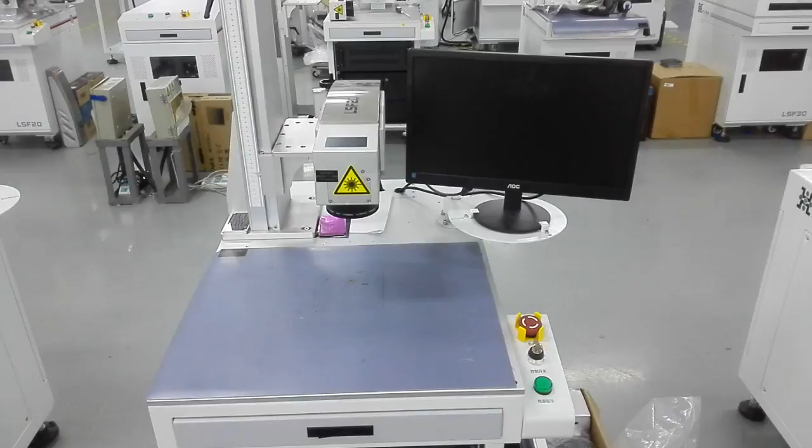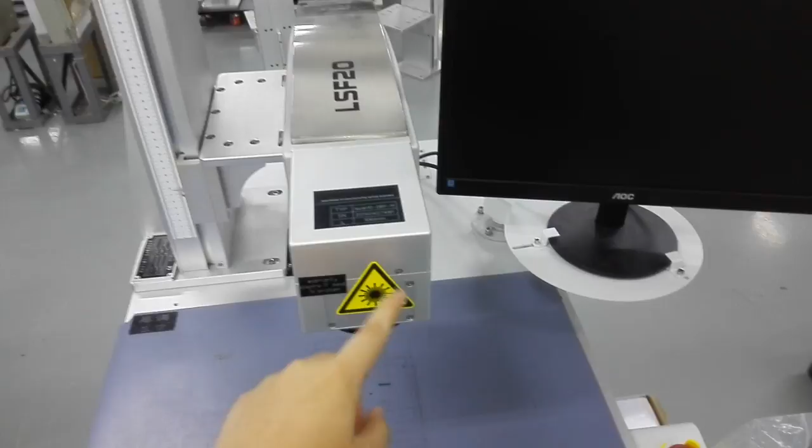HGLaser LSF Laser Marking System Operation Guidance. Our system is a 20-watt fiber laser system. It is air cooled. Here is the galvo head. The laser will come out from here and do the marking at this area.

The software interface will be shown on this screen. Here is the power off and power on switch, and also the emergency button.

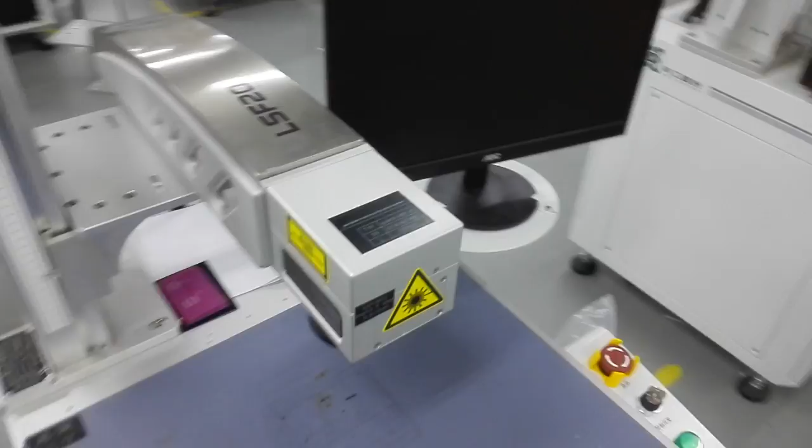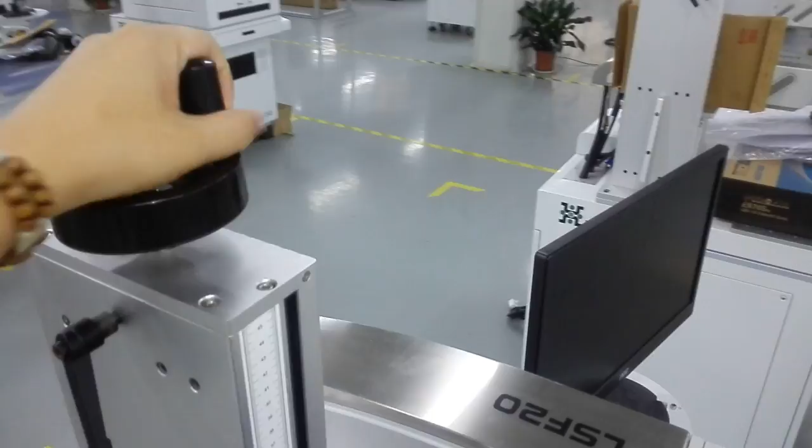With the laser marking system, you should always do the marking in the focus area. So here, you should adjust the height. The adjustment method is to use this to unlock it, and the height can be adjusted by this wheel manually.

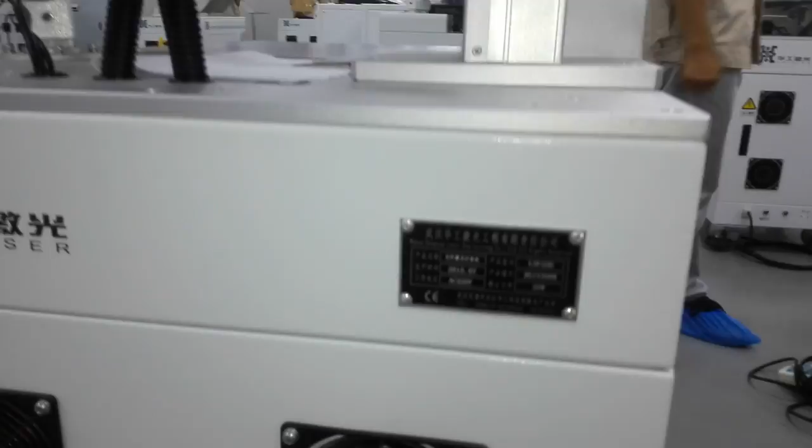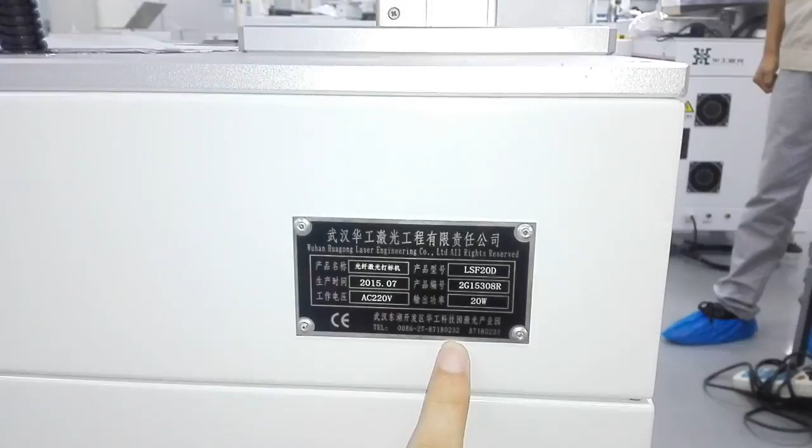If there is any service issue, please contact our local agent or us through our website. On all of our systems there is a nameplate. Just mention the serial number to us and call us or our local person. Now I will introduce how to use our system.

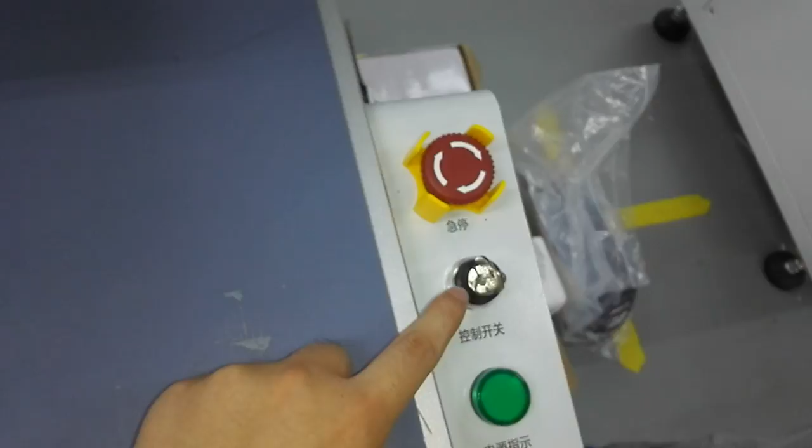When you want to turn on the system, ensure this emergency button is released. Otherwise, the system will be locked and you cannot turn it on. Here is the power switch. To turn on the system, first turn the main power switch on. Second, turn the key switch on, and the light will show green.

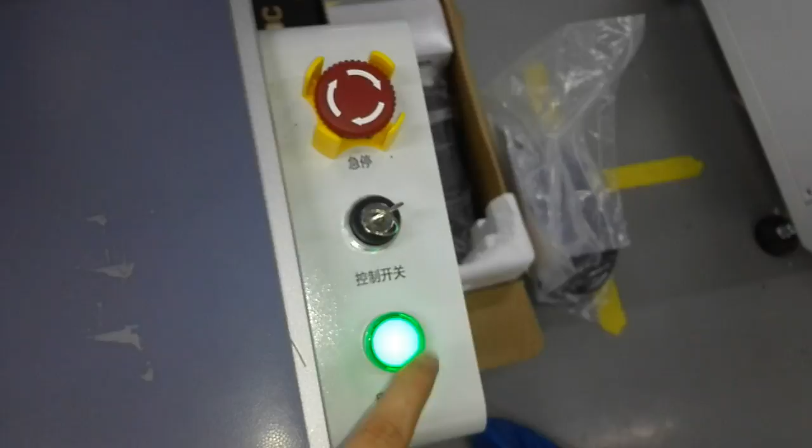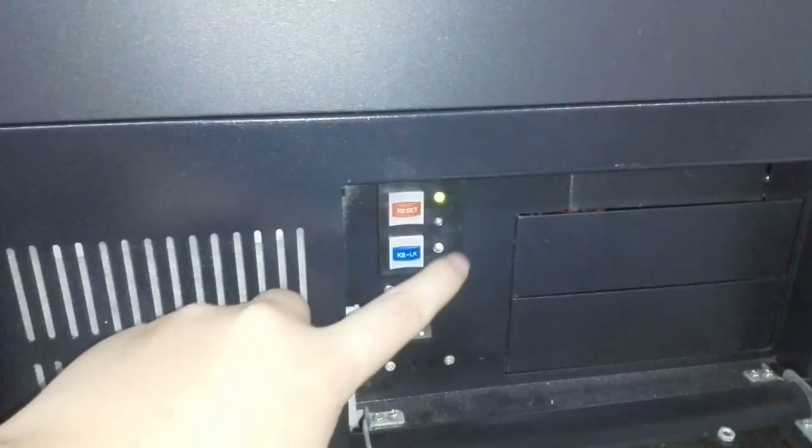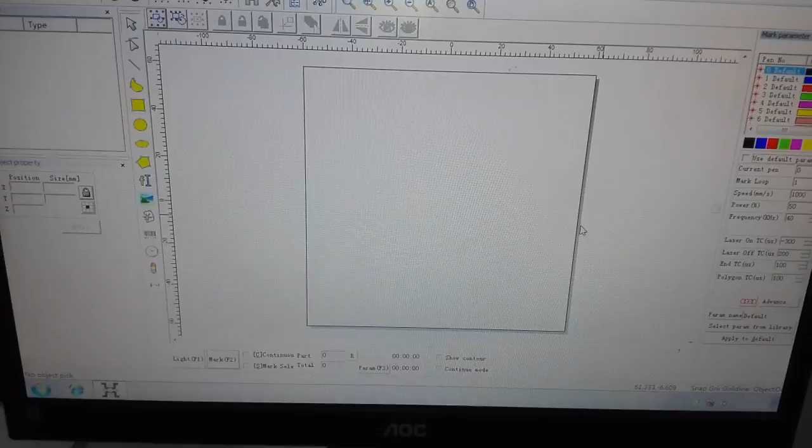Below the system is our control PC. Just turn on this button, and in normal working condition, this should show a green light. Once you turn on the PC, you can see on the PC screen our software interface. Then press enter. Once you enter the software, here is our software operation interface.

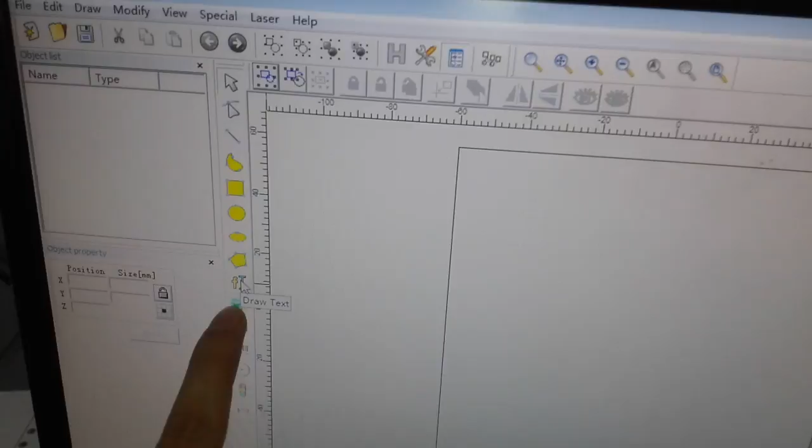You can draw simple graphics from here. If you want to mark a barcode, you should use this one. If you want to add text, you can use this one. On the right side, all the parameters are shown. Normally, we just use three parameters: speed, power, and frequency.

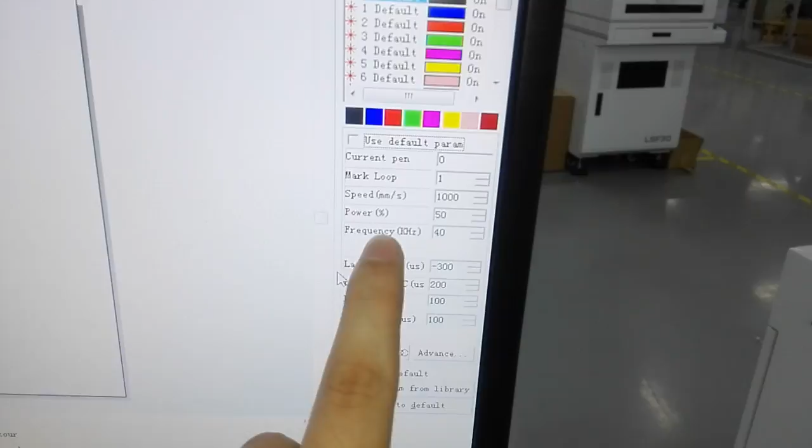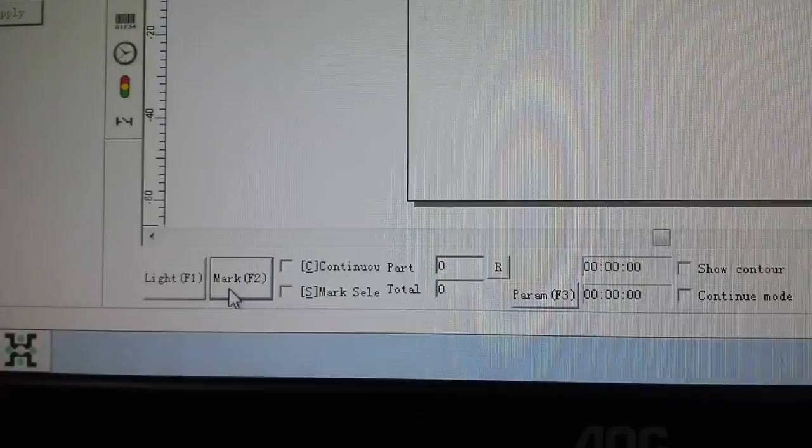At the bottom of the software, there are two buttons. One is the red indicator, which shows the scan area. The mark button turns on the laser beam to start the marking process. Now we will show you how to adjust the Z focus.

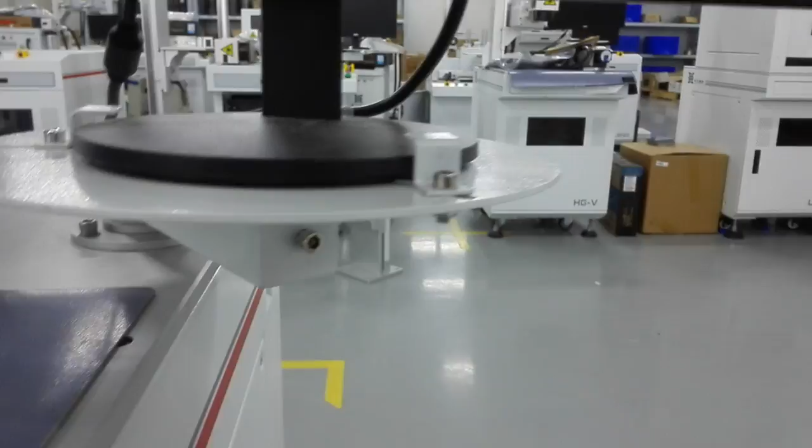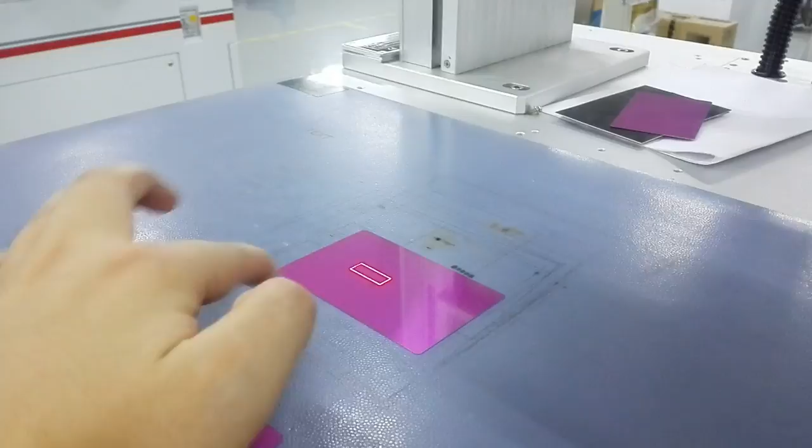First, drop one text on the interface. Then use the red indicator. You can get the exact area on the marking place. Then choose continuous to start the marking. You can see the marking is not clear.

Once you adjust the Z-axis, the marking will be different. Just find the most powerful area, like this one, then stop. At that position, we get the clearest marking. So this is the right position.

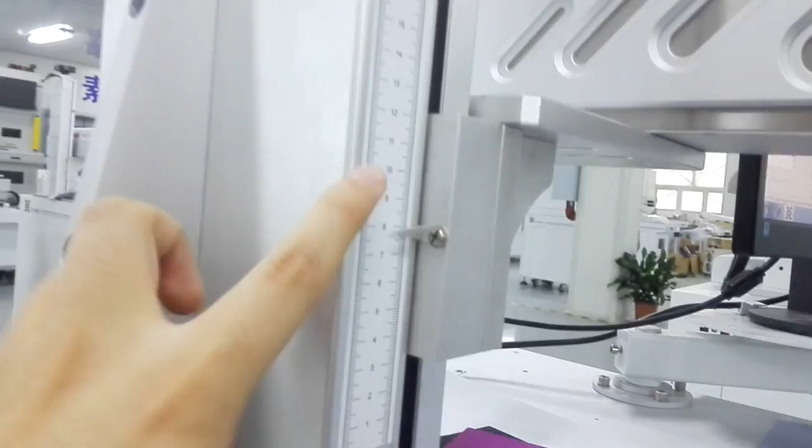Then you can record the Z-axis data in your notebook. So next time you mark this kind of item, you can use the same height. Different materials have different heights. So every time the height of the item is different, you should adjust the Z-axis manually and then take a record.

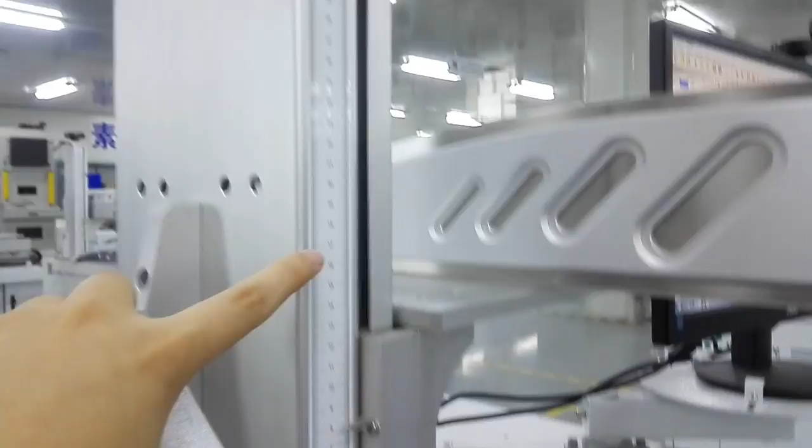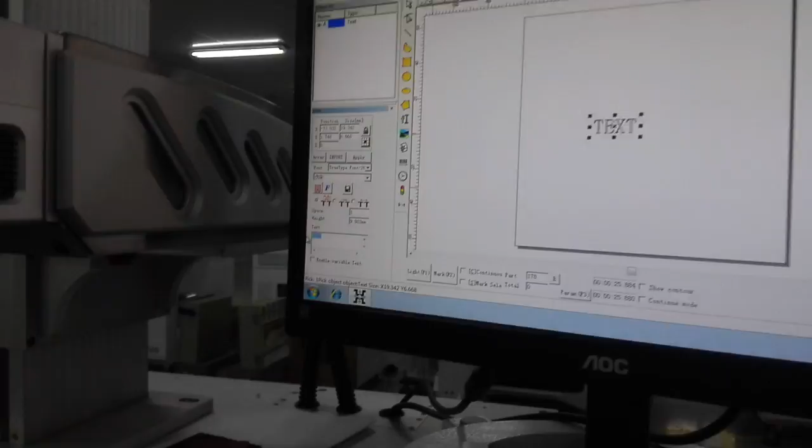Now we will tell you how to set the marking parameters. Now we will show you how to do a text marking. First, select the text and drop it in the area. The default text will be text one. Here is a text input interface. Just type what you want and click apply. Here it will change into the exact text.

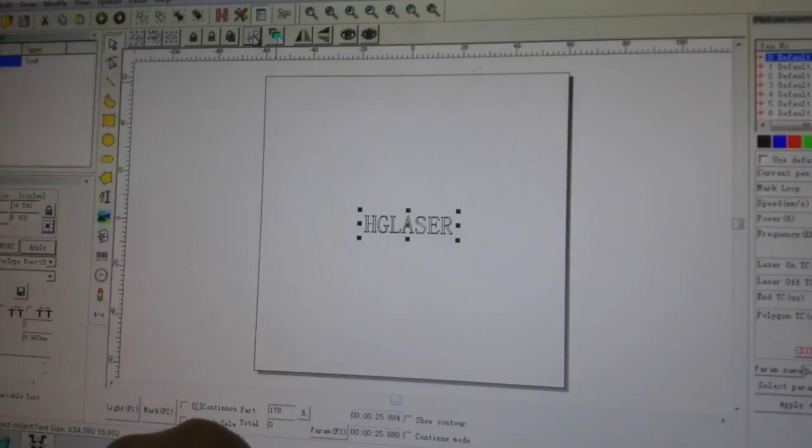If you want to fill in the text, you should use the fill method. In this interface, you can use different parameters to do different kinds of filling. Let's set the filling distance to 0.5.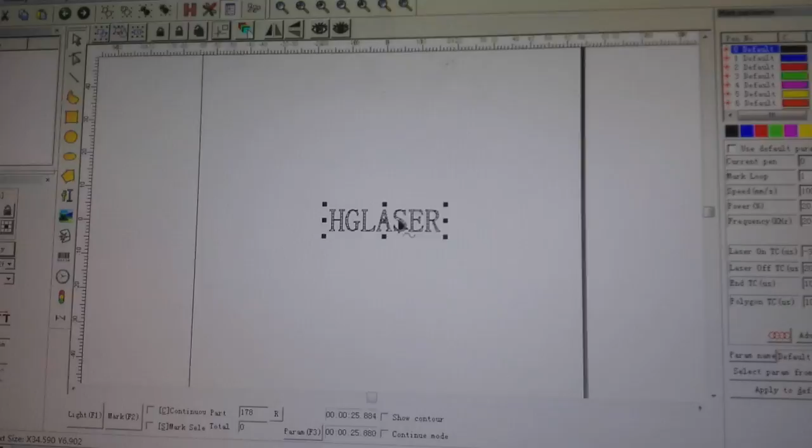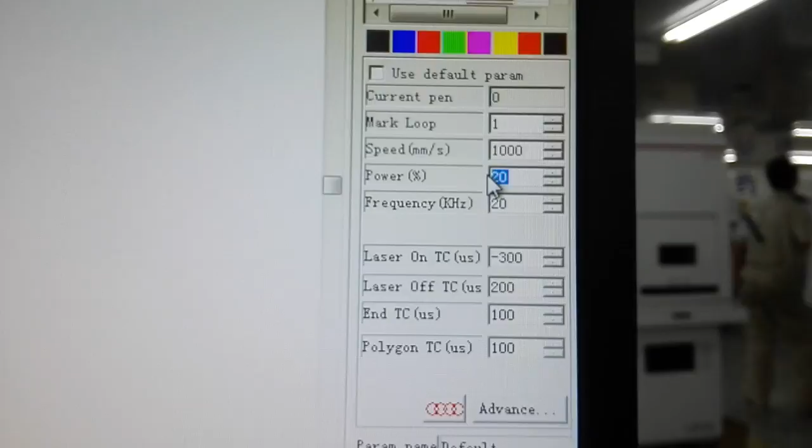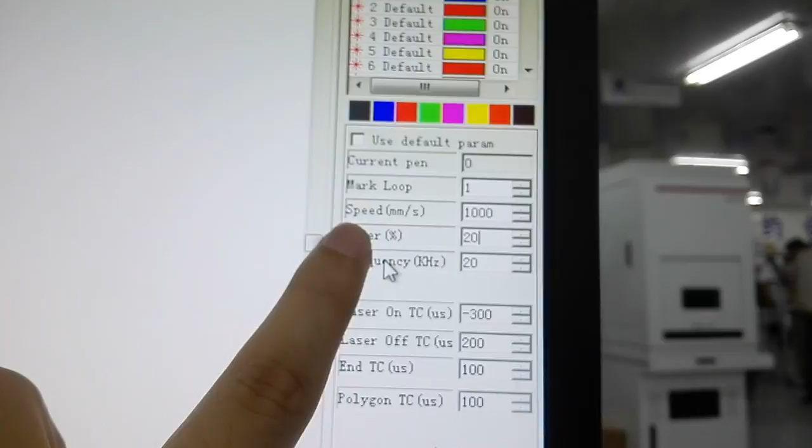And then you can see it's already filled. Now we will show you how different parameters produce different marking appearances. Normally, for marking, we use speed, power, and frequency. Right now, we keep the power and frequency the same and set different speeds. The marking speed is 1000 mm per second.

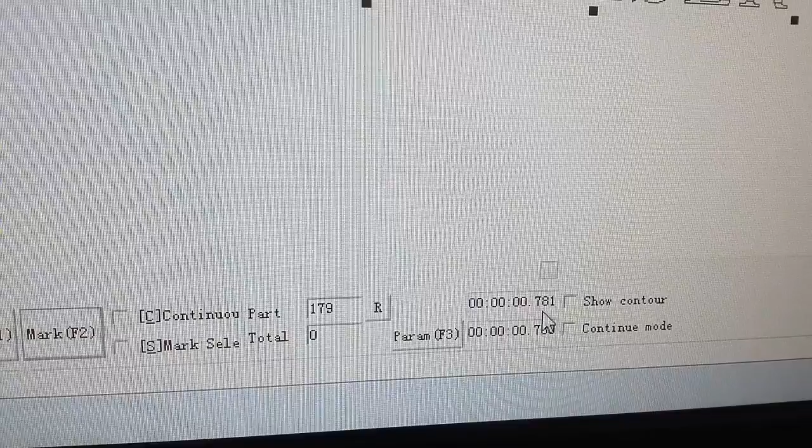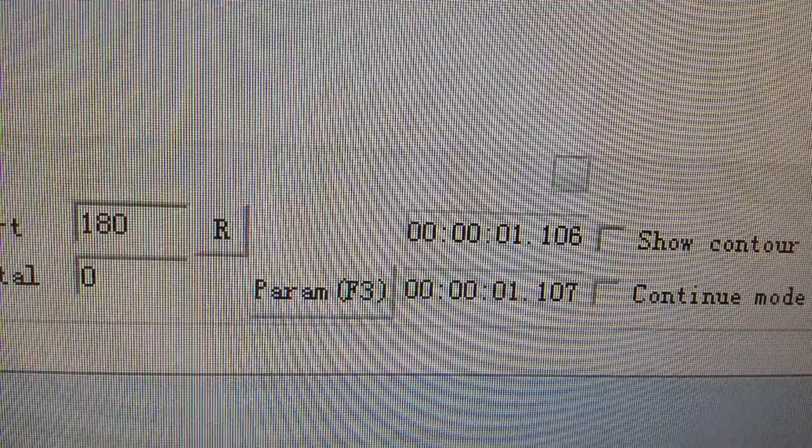You can see the different marking appearance. With less marking speed, the marking accuracy, resolution would be nicer. With small marking speed, you can get more clear marking.

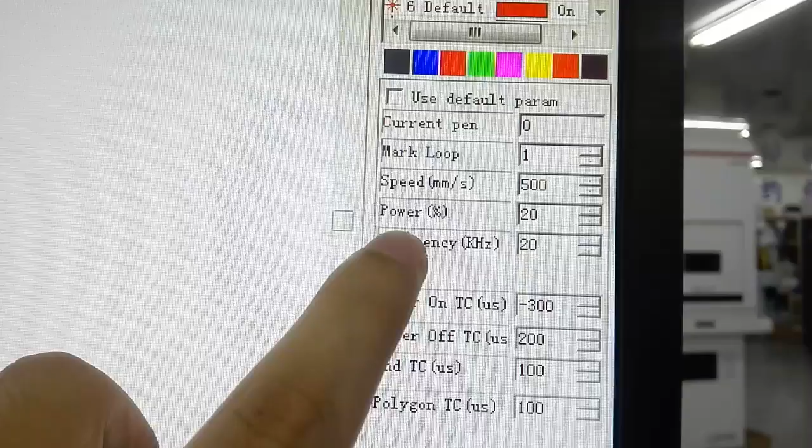Right now, we keep the speed the same, and we change the power. In this condition, the power is 20%. Let's see what we can get. The marking is in 20% laser output energy. It's clear, but seems a bit light.

Let's set the power to 90%. See, here we already changed the power output to 90%. Here we click Start Marking. You can see the 90% of the output power. It can get more clear marking than the 20%.

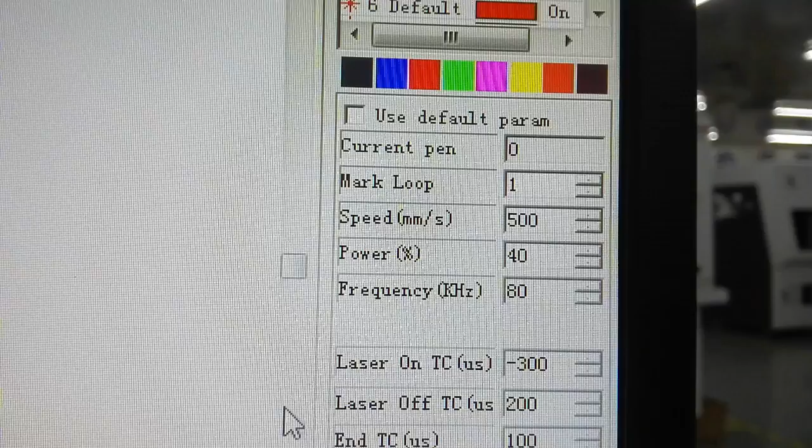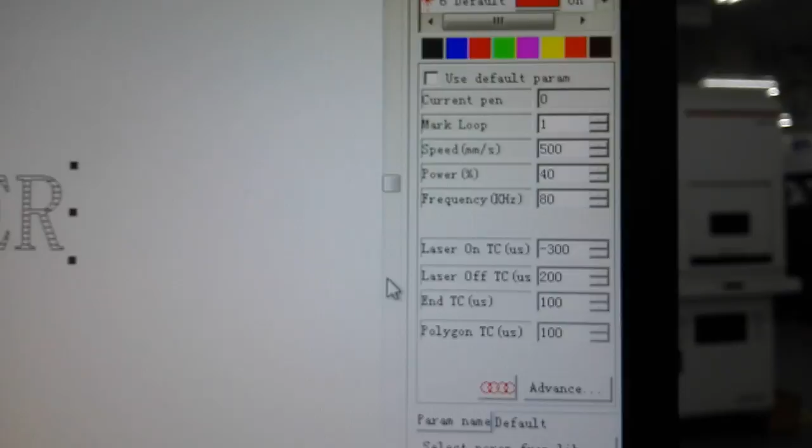Right now, we keep the speed and the power the same, but we change the frequency. Right now, we change the frequency, set it as 80 kHz. Let's see what will happen. Okay. You can see in 80 kHz, the marking is a bit light in color, but seems in good resolution.

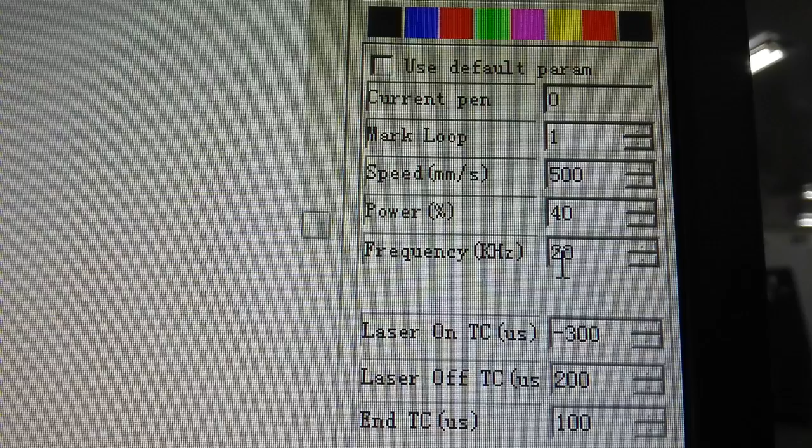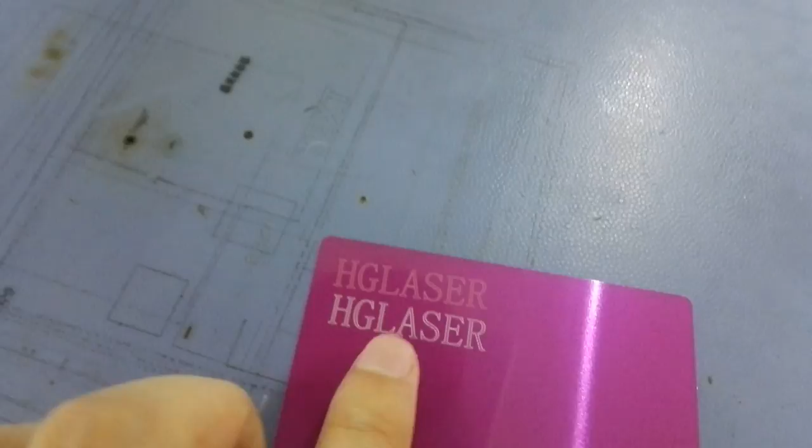The frequency into 20 kHz. And here we mark. You can see the color would be more, but the resolution would be worse than the high frequency one.

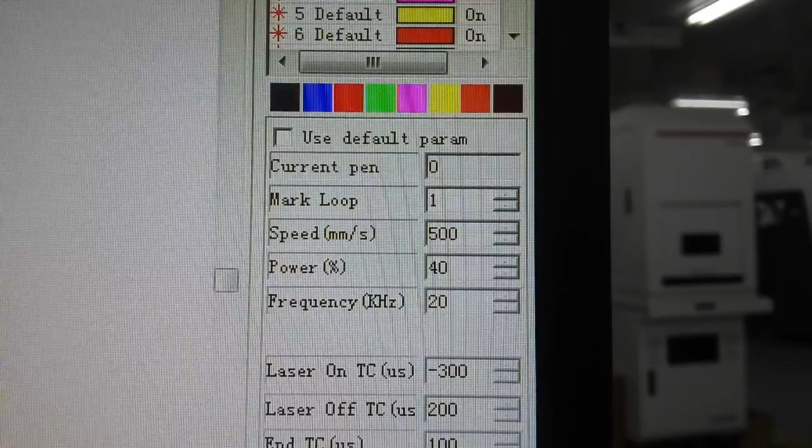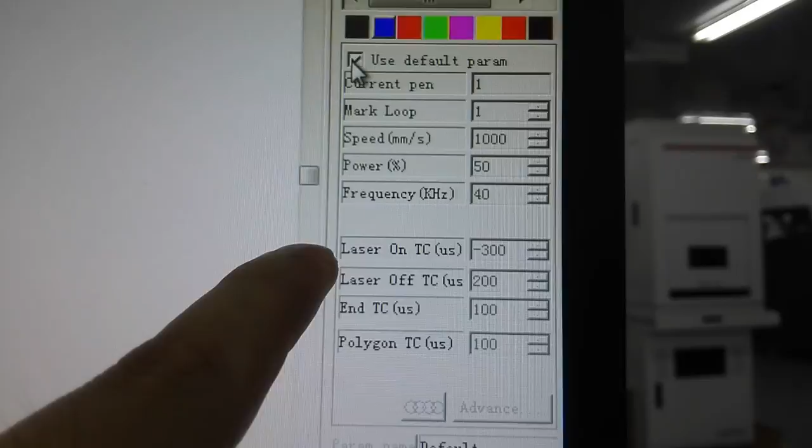So for different material marking, you should change to different speed, power, and frequency. You should test the material and then find the suitable one. But just notice the z-axis, you should find it in the right way.

Okay, there was one more question. Normally, sometimes we should mark different appearances by different parameters. How to achieve it? We can use these different layer colors. Different color means you can use a different layer. In each layer, you can lock different parameters.

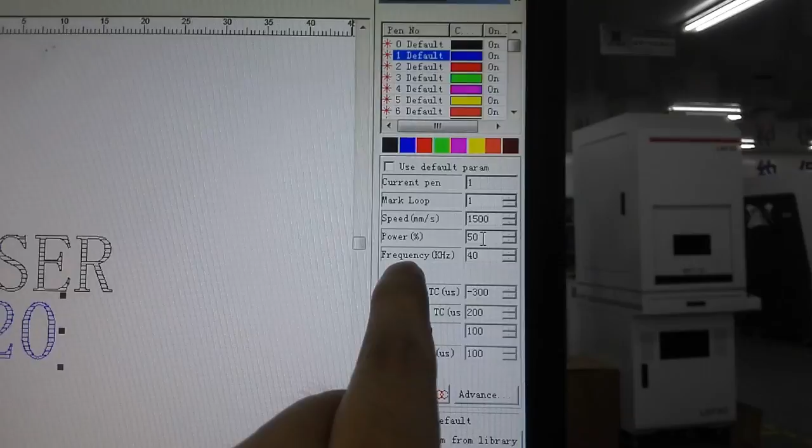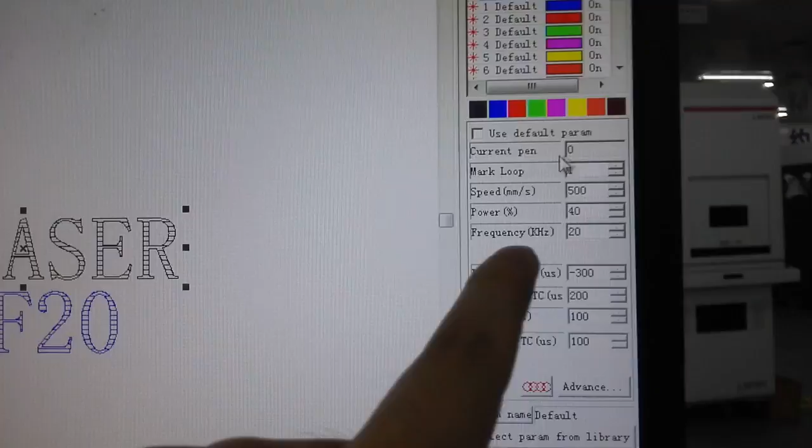See, there were two layers. In the black layer, the parameter setting is like this. But for the blue layer, the parameter setting is different. So the marking appearance would be different. We will show you. You can see by different parameter layers, the marking quality would be different.

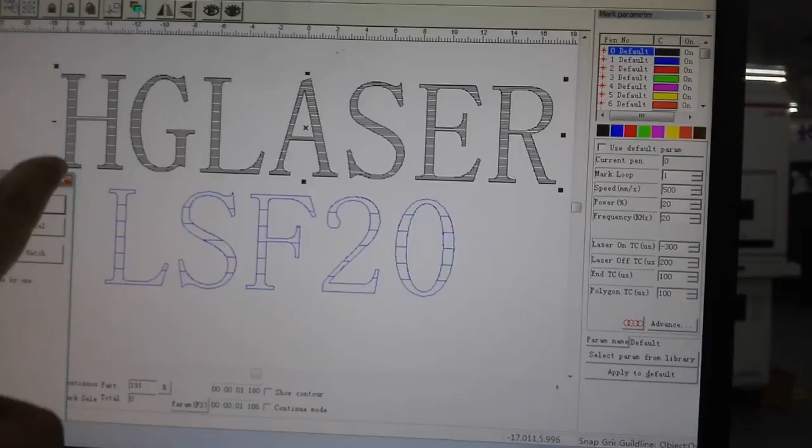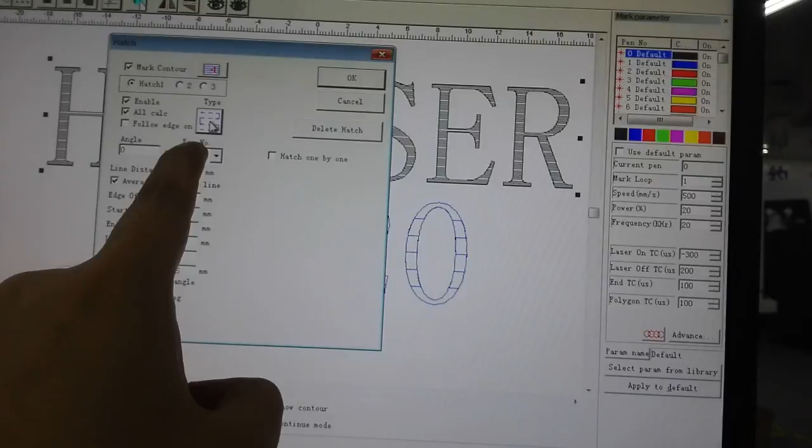During the laser marking, not only should we mark the single line, but sometimes you should mark with filling. So how to set the different filling? You can use this button. Like here, this button, there are 4 different filling methods, and this one is the fastest one. If you want to get the best marking quality, then you can select this one. Normally, the filling space is set by this parameter.

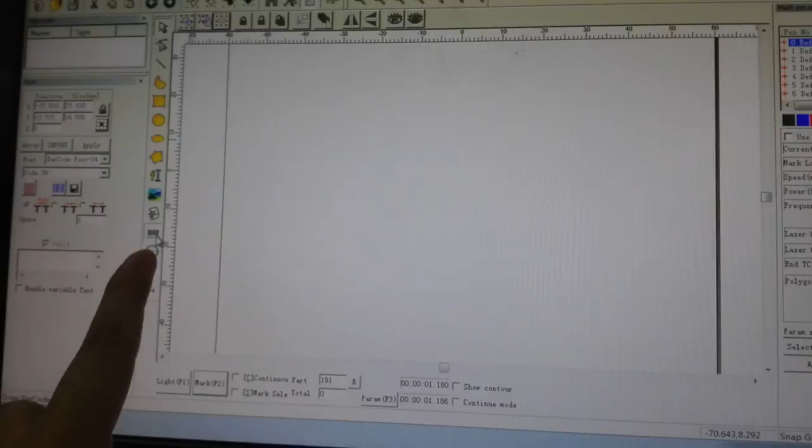Now, I will tell you how to mark the barcode or data matrix. Click this button and drop one into the interface window. Here, you can input exactly which message you want. For example, HGLaser. Click apply. So here you can choose different barcode types. Let's make it data matrix.

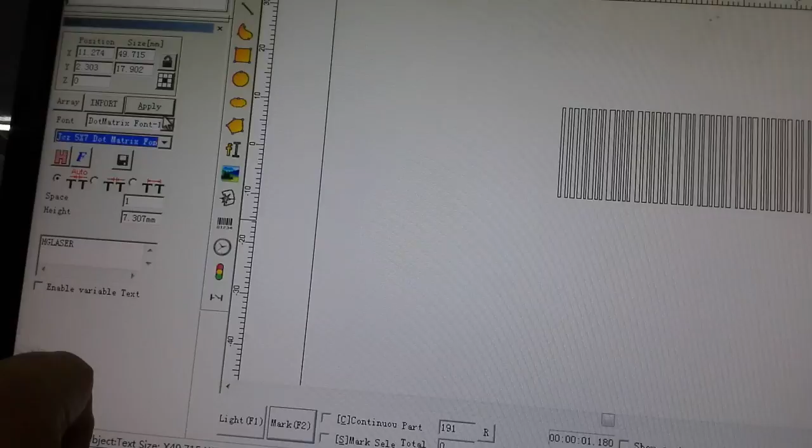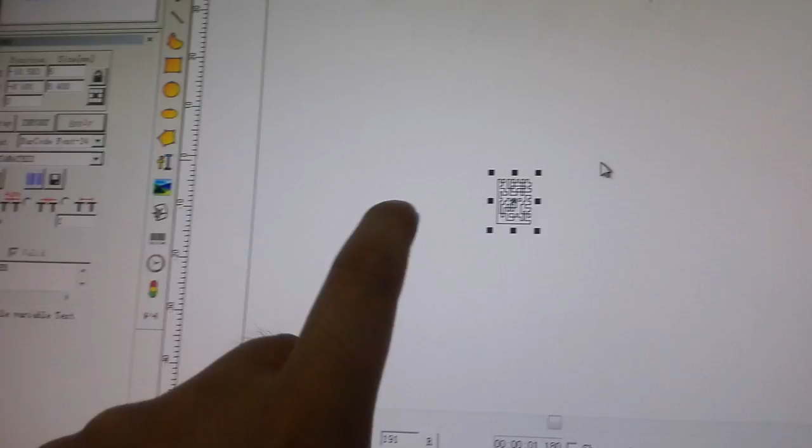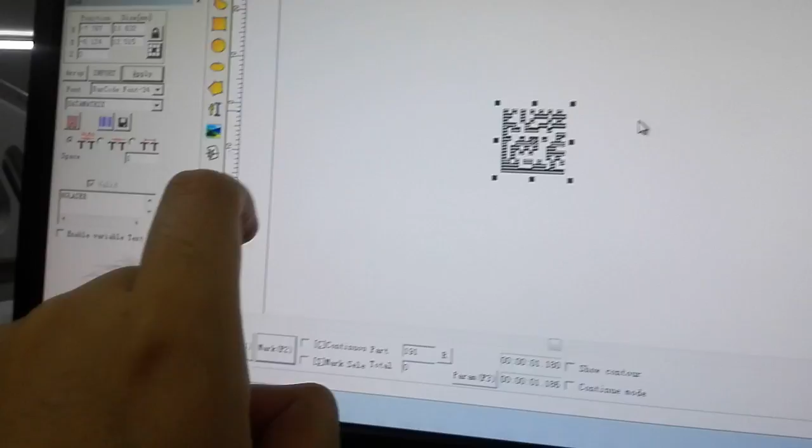Apply. 二维码，选一个二维码。Now we get the data matrix. So normally this data matrix would be used with filling. Select your suitable distance and the filling method. And you will get the HGLaser barcode. Let's see what will happen. Okay, here we get the barcode.

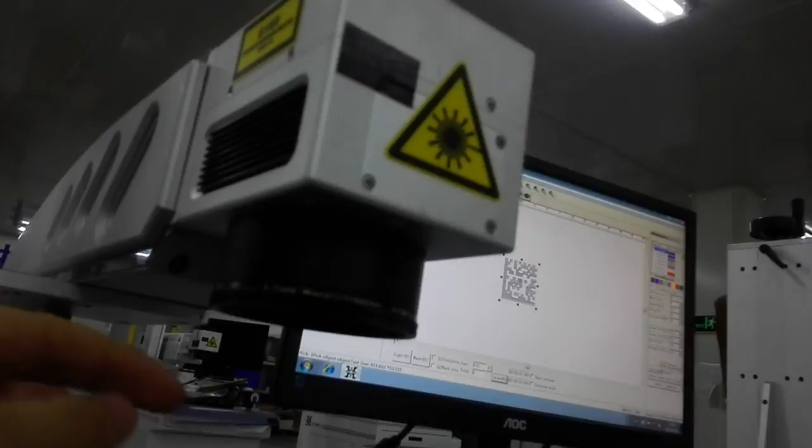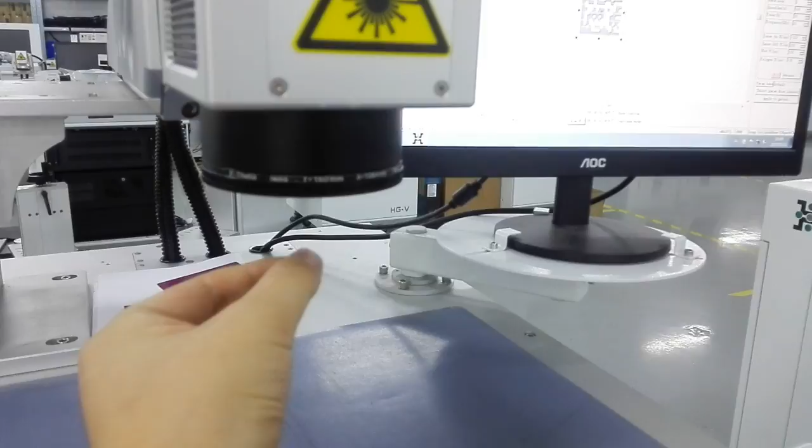Okay, right now the brief marking guidance is already given. So normally, for the laser marking system, you should keep it clean. You can see below there is one lens. During the marking, the dust will vaporize onto the lens. So you should get it cleaned, maybe once a week. You should use alcohol to clean the surface.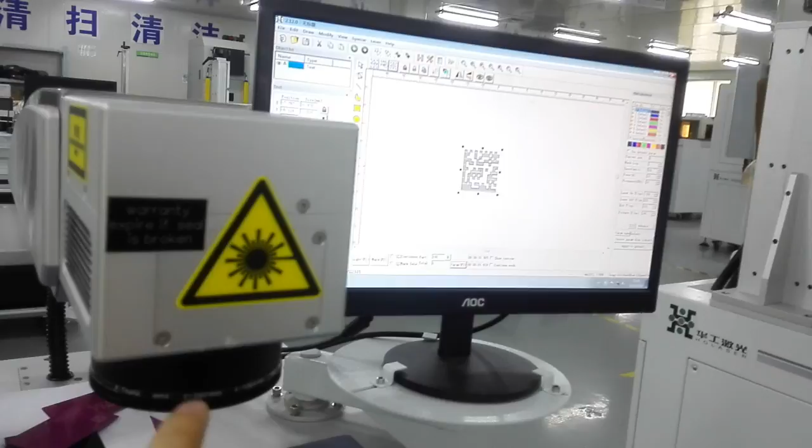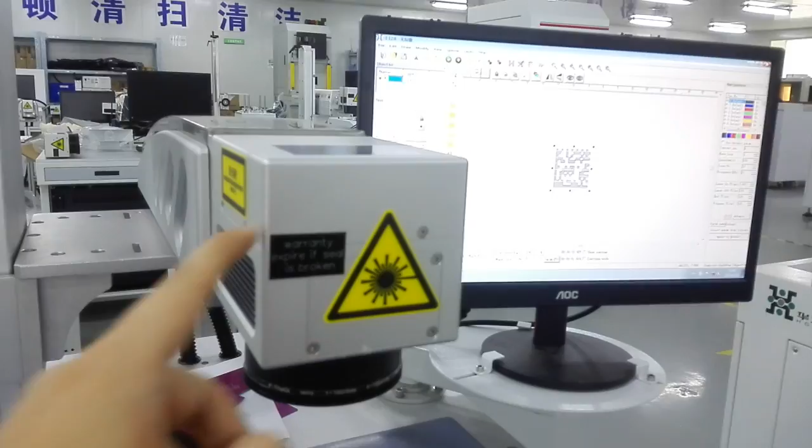And also, inside the galvo head, there are 2 micro motors. Don't get it punched or seriously shaken. Otherwise, you will get the galvo head damaged. And also you can see the laser is coming out from this head but transmitted by this fiber cable. So it's very easy to break, it's breakable. So don't punch it, don't do that. And keep it at a certain distance.

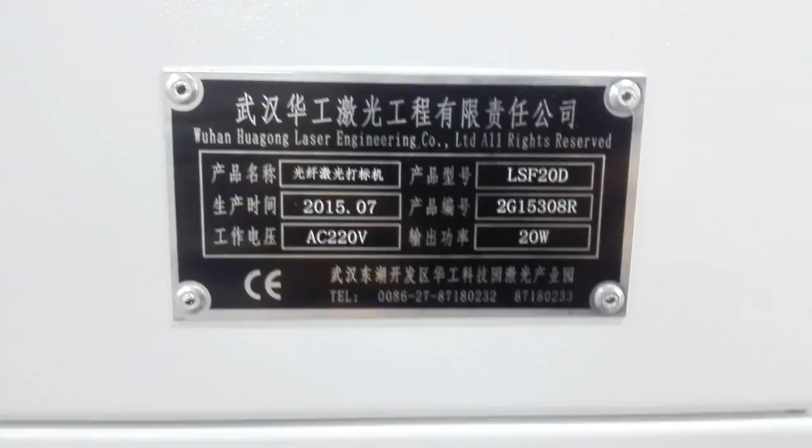Inside the cavity, you can see the laser source. So don't get the yellow cable broken, and make sure the laser source is in clean condition. For more information, you can find it in our operation manual. If the issue still cannot be solved, just mention the serial number to us, call our after-sales service department, or contact our local agent.